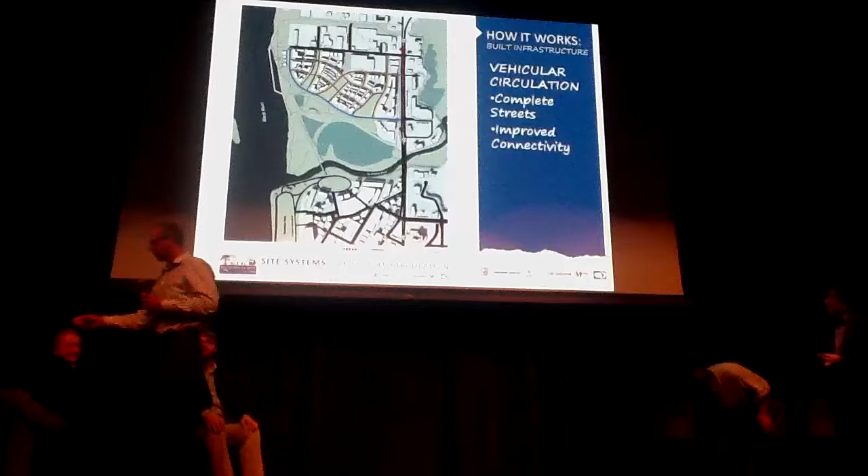This is the part of the presentation where hopefully we keep you awake, but we just want to give you a sense of the detail.

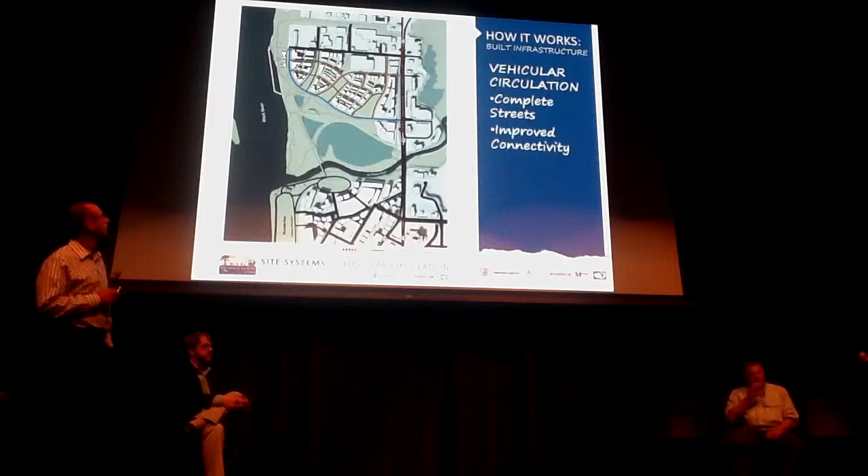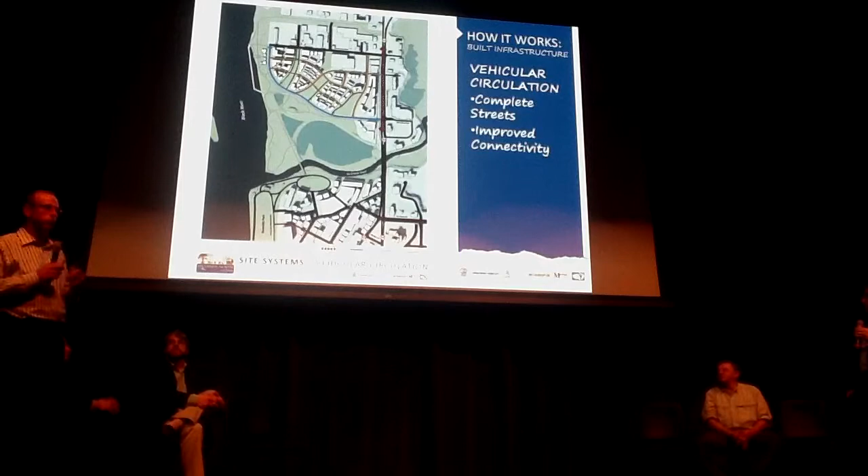So we're going to go through these pieces. As far as vehicular circulation, that's one element, and we have a slide coming up to talk about the bikes and the peds too, but we want to make sure the system worked for all users. We do want cars, we do want to walk, we do want to bike, but we want to make sure that whatever we design here successfully interfaces with Copeland.

So Bob described a little bit about how Copeland would be re-envisioned with a landscape median, with bike lanes, and a fairly significant sidewalk—about 25 to 30 feet coming off here. But really looking at how are we going to get in and out of the site.

So you have two signals here, one at River Bend, one at Causeway. Those would be the safe and efficient places to get in and out of the site, so we wanted to make sure we tied into the existing signals.

Equally important, we want to make sure we have north-south connectivity. So if you want to get from one end to the other end, you have roads to help you do that. This here would be developed as a parkway to allow you to get up and also into the site along this parkway facility, just to really make sure you can get in and around without always having to rely on Copeland.

I think the other thing this lets you know is that there's not just one kind of street. We understand that as the neighborhood builds out and as we move through our daily lives, we have some roads running—actually 4 street types plus some carriageways and lanes that would be part of this system. You'll see some other drawings that kind of describe it.

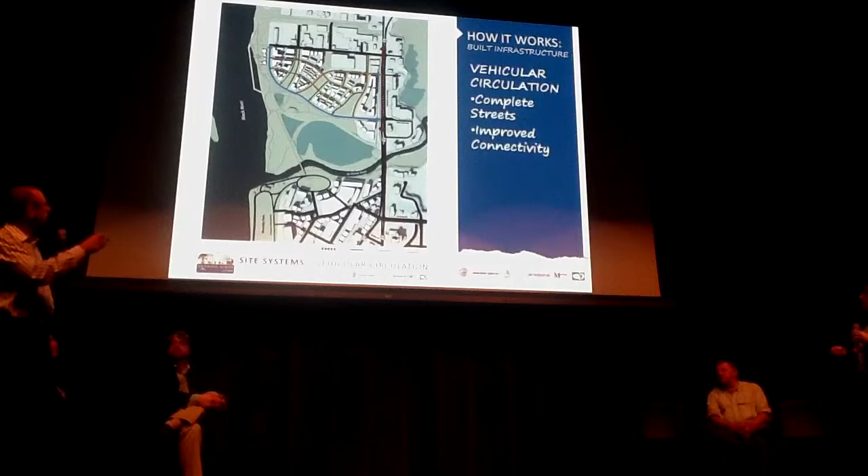One other thing, we generally like to look at grids—grid street systems are things that work really well. We kind of looked at that here, but we wanted to make something that utilized the grid, yet also fit into the more natural layout of the land. So you'll see a bit of a grid, but it's a little more modified, and it really fits nicely with this particular site.

So as we look at a modified Copeland, here in this area we're about 20 feet wide in sidewalk with some trees. We've got a bike lane, and what we're suggesting is that parking be brought to that side of the street, so it starts to feel more like a real downtown street. Here's our apartment buildings or stacked flats. We repurpose that median, get it wider, and start treating stormwater in it.

It allows us to do some native and natural planting in there—2 lanes in both directions. This also serves for some turn laning, and again that 6-foot shoulder bike lane on the other side. Rather than just have brick pavers running along the side of the street, we really think bringing in more green, getting some street trees, so we really start to close this in and green it up.

Do you want to talk about the significance of this?

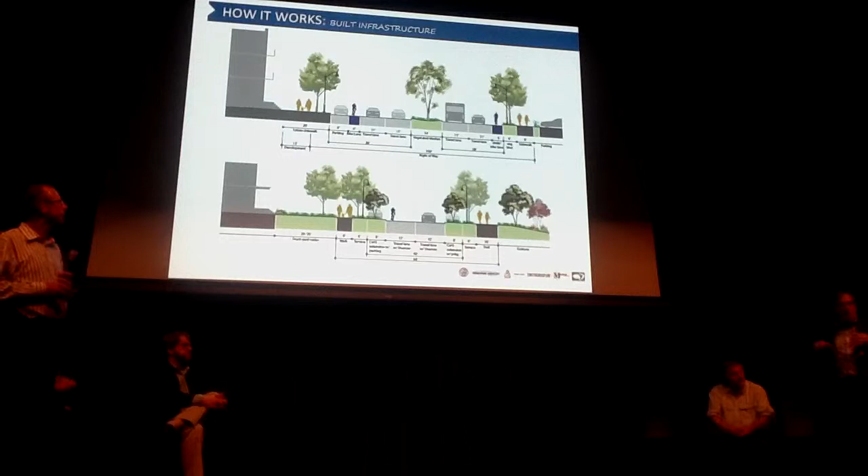So part of this variable width, as we understand it in terms of parades and other public activities that happen in the community, there's a place for people to gather when that's happening. In other places we've got this up to about 30 feet wide, again it's that issue of living on the street, getting eyes on it, and humanizing it so that it really starts to feel like part of the community and becomes an address for you. And that really is the signature, I think, of the Avenue District.

Here is our typical local street that also has a shared travelway for bicycles, understanding that people want to get to and from in this town, not just being in their automobile. You've got a great bike culture, and we think this new neighborhood can really support that.

Again, with sidewalks we would be using curb extensions that would have some rain garden plantings in them. In this case, here's the trail, the ecotone. This really starts to create that parkway look and feel as you move into the native area that Steve was just describing.

So these would put cars in bays and then sharing the road with cyclists. We probably would have narrowed up the street section a little more if we thought all the cyclists would stay on the trail. But we know that if you're getting on a bike to go to work, you want to be on the street and you want to be moving with traffic. So this recognizes that kind of lifestyle.

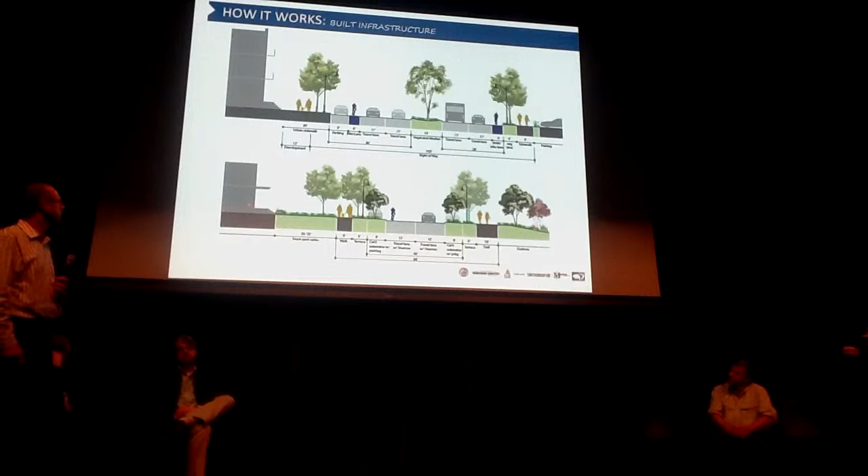Front yards along this parkway are really going to vary, and part of that is solar exposure and how you're going to use your front yard. But they'd be a little bit deeper here than they might be on the other streets.

So our typical two-way street with parking on both sides would be a 10-foot drive lane, our suggestion. And we'll basically have a sidewalk and a narrower yard that might be about 15 feet. So that plays that way. And again, get some decorative lighting on it and landscaping.

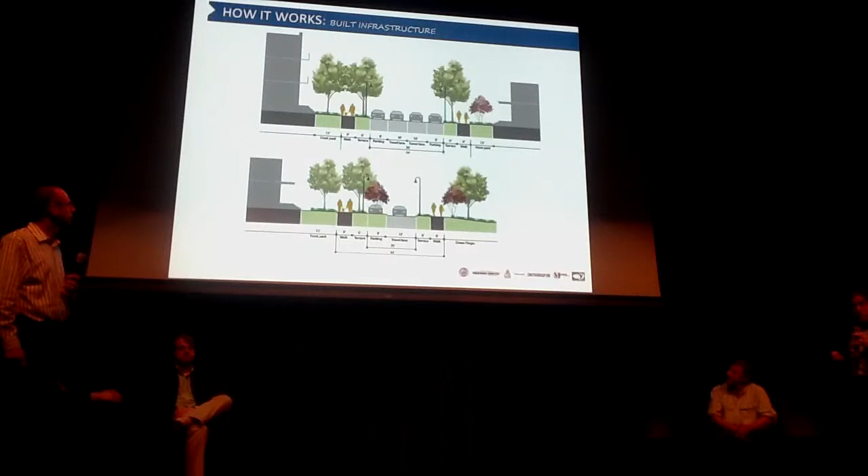And then our last street type right now is running basically along the green fingers, and that's a one-way system, one-way north, one-way south. And that kind of runs along these areas.

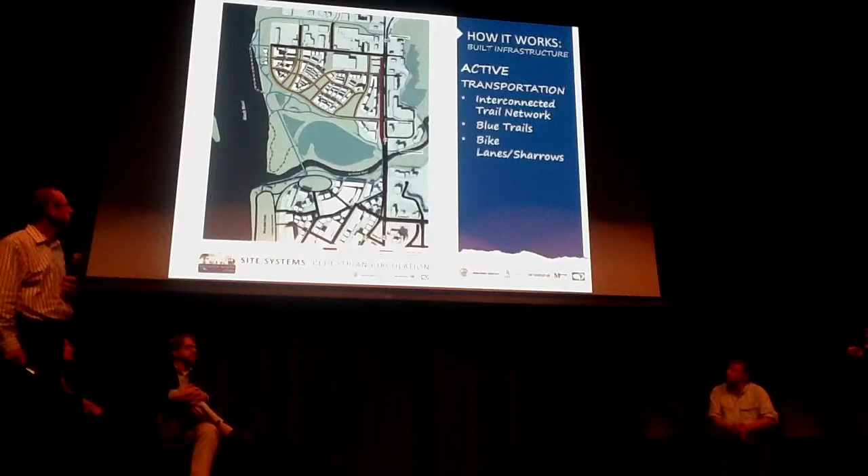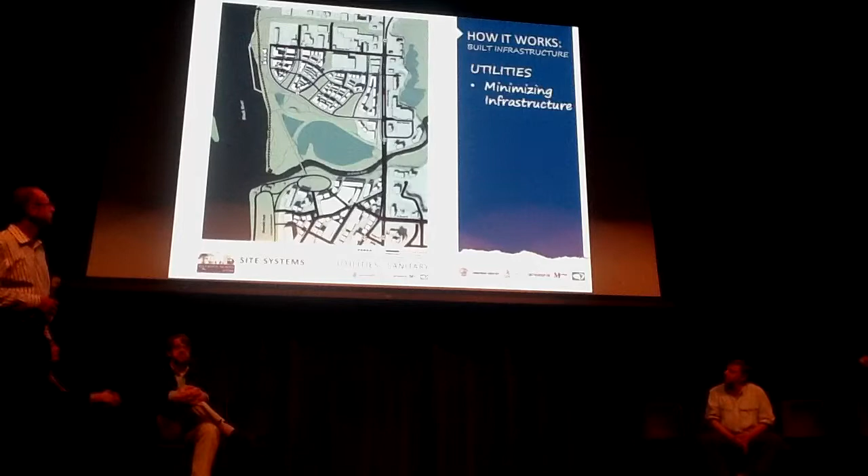And the same thing goes with the sewer. There seems to be capacity. We'd be tying into the current system, and since all of this would be new infrastructure, again, we're working closely in our next phase with city staff to make sure that that's all done purposefully.

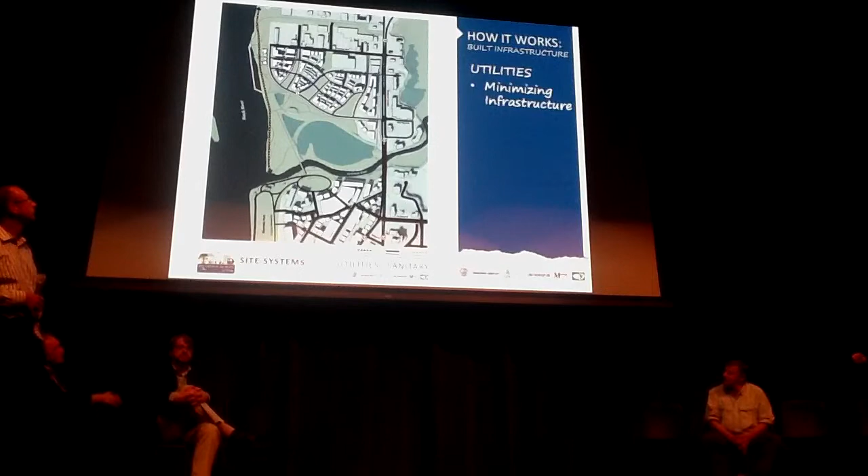But I think the real vision here is to minimize infrastructure, and Tom will talk more about that with the light imprint system that he's developed, that we'll also be placing on there, which works quite well with Steve and Doug's frameworks. This is for Tom and Mary.